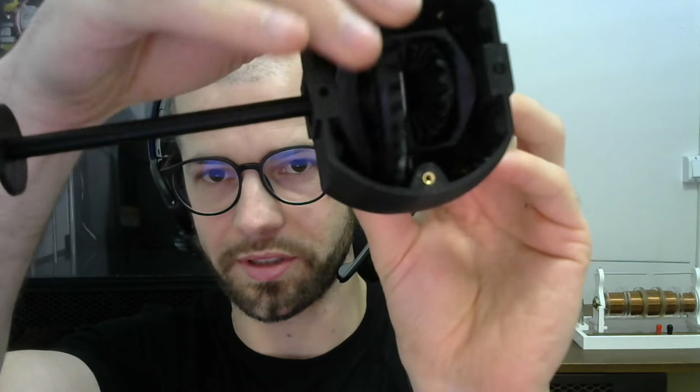I will start showing my first version of my differential, which is this big guy here. Inside you can see the gears. Let me rotate it a little so you can see the spiders and side gears rotating as I turn it. And if we rotate the shaft, you can see the entire piece rolling inside, which is amazing.

This was my first version because it was easier to make a bigger part like this, and then I decided to try making a small version of it. So I did a version with half the size, which is this one. I'm really proud of this version because it's small and more simple to draw.

Of course, it was more simple because I had a lot of experience from the previous one. It's flexible too, so it's easy to change and modify as you need. Let's see this working first.

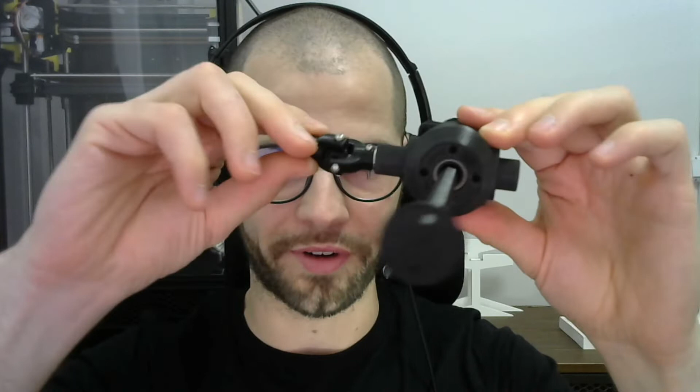As you can see, we can turn this. Here I can show it: we can just turn the main shaft, and the two lateral shafts will turn in this direction.

If I hold the main shaft and turn this one shaft, the other one will turn the other way around. And of course, if I just turn the shaft, this main one will turn again.

This little part was amazing to do, and it was more easy than the whole differential, but it was amazing. And that's it.

So let's break it apart to show each piece. These are just simple shafts which you can put here and easily remove. The goal is just to transfer the torque between this gear and anything you want here. You can just put a rod or make another part, as I will on this version.

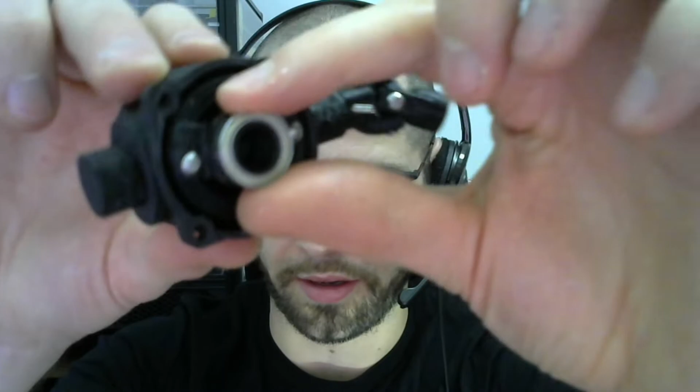Here we have the lateral connection, used for the main shaft that will hold everything. If I open it, we can see the holder of the bearing, and here the internal structure. I will need to remove this first. Okay, just remove it, and this is the whole case.

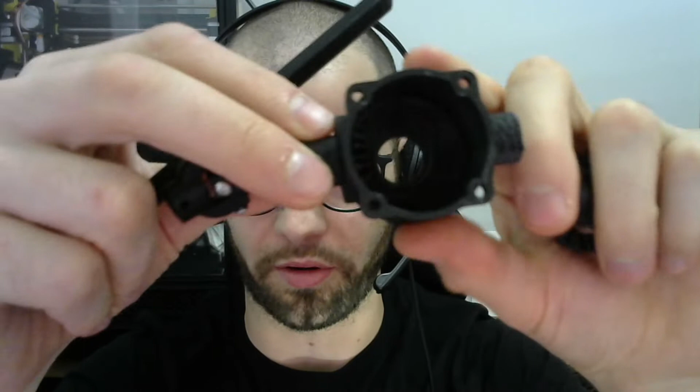We can see a gear inside of it - the main pinion. And here, let me connect the lateral shafts again.

It's really interesting to see this working. As I turn one side, the other side will turn the other way around.

I tried my best to use simple pieces, like using the same bearings inside and outside. On this one, I used only one model, one size of bearing. On this one, I used two sizes because this one is smaller, so we have two - one inside, another outside. And here, the four bearings are the same.

So it's easy - I can just remove it. This is the entire internal piece. Now it's easy to connect and easy to modify, as I will show you.

Okay, now I will show the Fusion process, how I did this differential. Of course, I will not show step by step, like drawing everything, because that would take about 4 hours of video. But I did a video showing how to do, in my view, the most complex part, which is this.

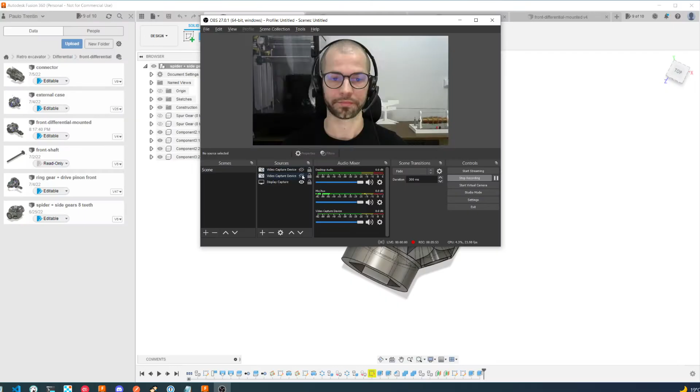So let's get to Fusion. I will start showing the first part of Fusion, the first part I did when I started making this smaller differential.

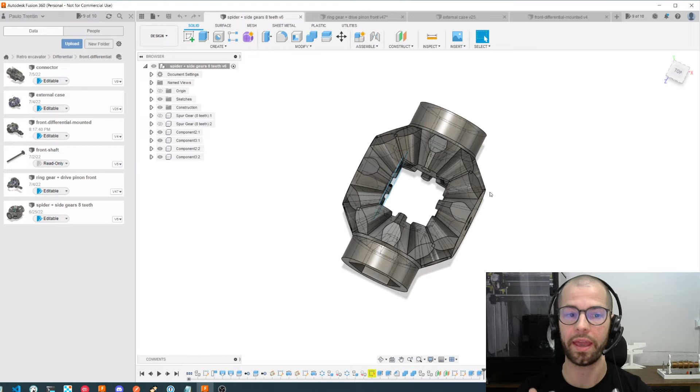Why is this the first part? Because I wanted it to be as small as possible, and the smallest gear I found viable for 3D printing, on a normal 3D printer like this, is a gear with 8 teeth. So all of those gears actually have 8 teeth.

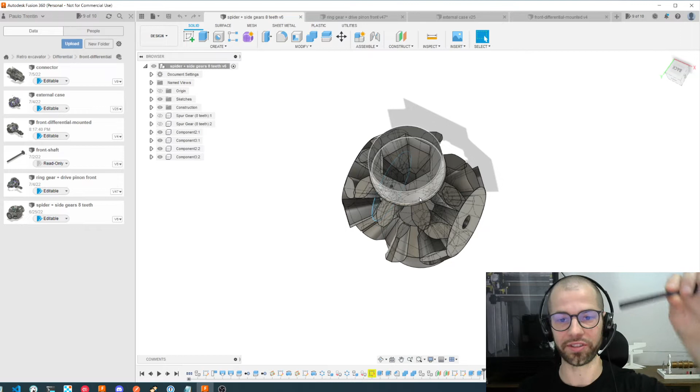These lateral ones are easy - we just have a hole here, and the top and bottom ones have this connection with the axis. This is interesting because you just plug it in and receive the whole force of the gear on this shaft section. So yeah, this is the first thing I did.

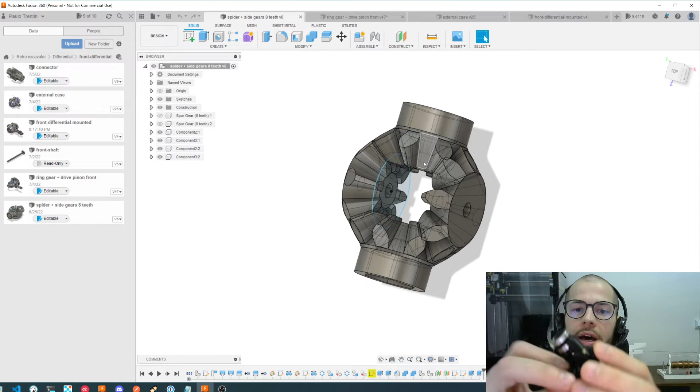Right after making this, I wanted to make this bigger one with the smallest size possible, because this bigger one defines the whole body of your differential, the whole structure around. So I try my best to make it as small as possible, and the knowledge to make this is the same as making these bevel gears, which I did an entire video about, two entire videos about it.

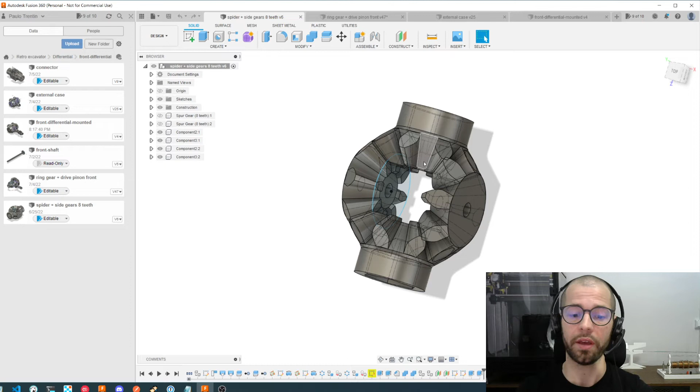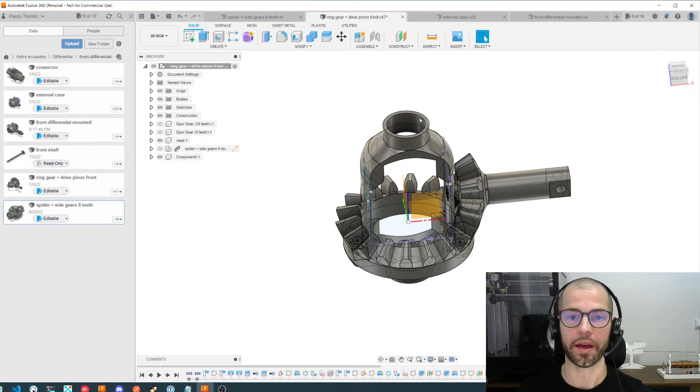Okay, so making this, we create another Fusion design, and one interesting thing about Fusion is you can import designs between designs. So I can create a new design and import anything I want around it. In this case, I just need to click insert into current design. So I will import this side gear, my side gear, inside of my drive, pinion, and ring gears.

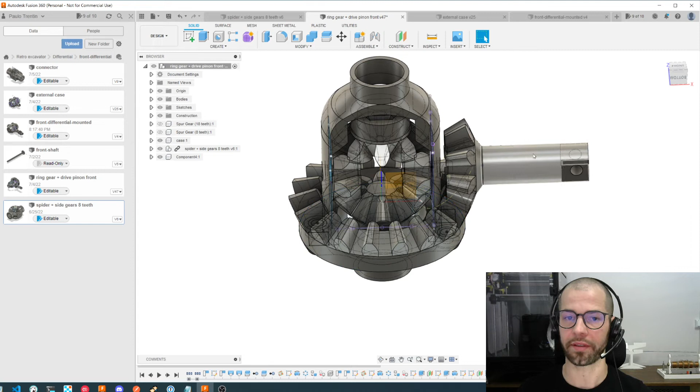So if I show here, I can show you the inside gears, and I use them as a reference for everything, because first of all, with this size in mind, I created this bottom gear, and of course this lateral pinion, and the whole structure here was created based on the distance between this gear, the ring gear, and this one. So everything was based and related on this gear.

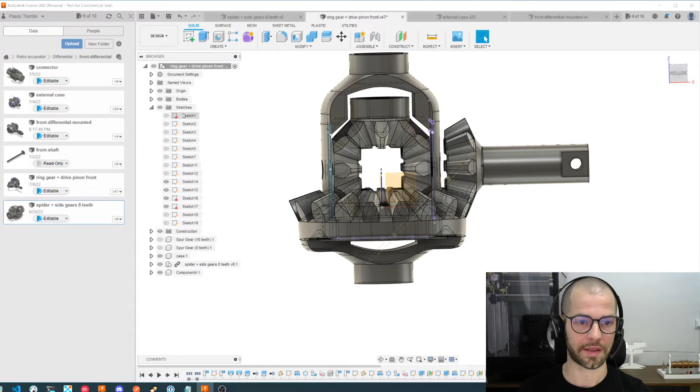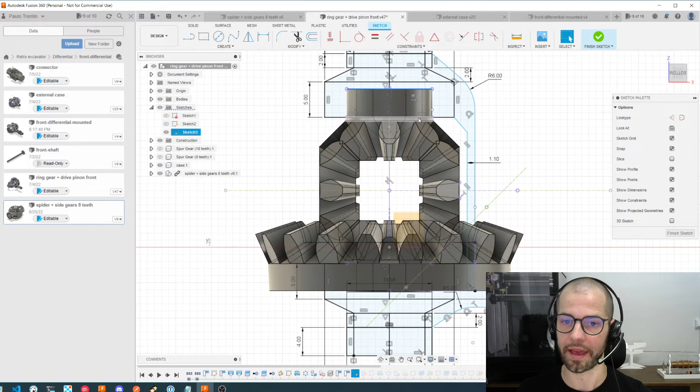So as you can see on sketches, let's get inside of sketch. This is the base gear. Yeah, this is the main structure. Let's edit it. Okay, now you can see basically what I did was importing these main gears inside of it, and I projected this line and this line, and of course the bottom ones too. Here I can remove this, yeah, this is better.

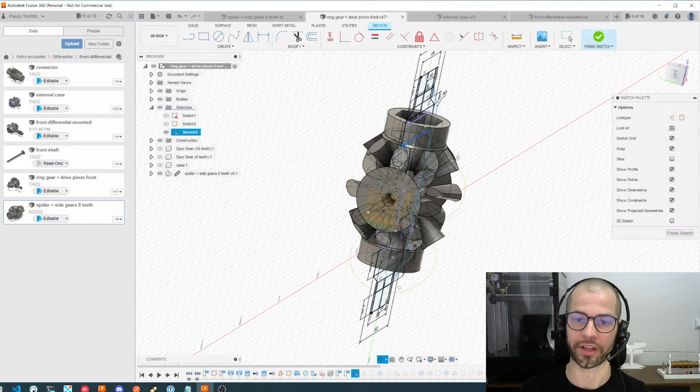So I started by projecting it and creating the whole sketch around it, because once you project, you have the exact position of each line you are projecting. This strategy was great, and it was easy to make everything around it, because what you just need to do is project the reference points that you want, and draw everything around.

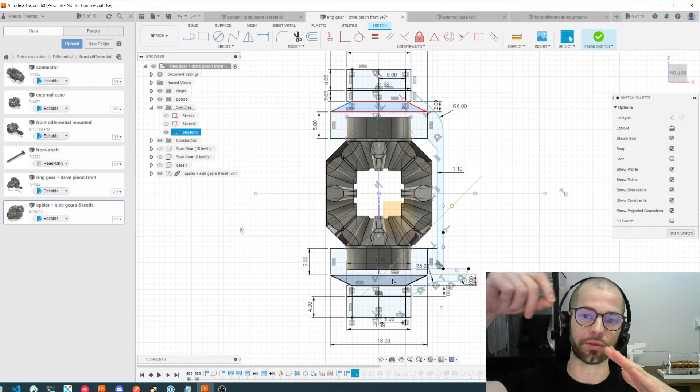For instance, this is the chamber of the bearing, and this is another chamber of another bearing, and those are connections, because on 3D printing it's not good to have a straight line, we need to have some angle to allow our printer to make the whole printing without needing to make bases on our print, which is good.

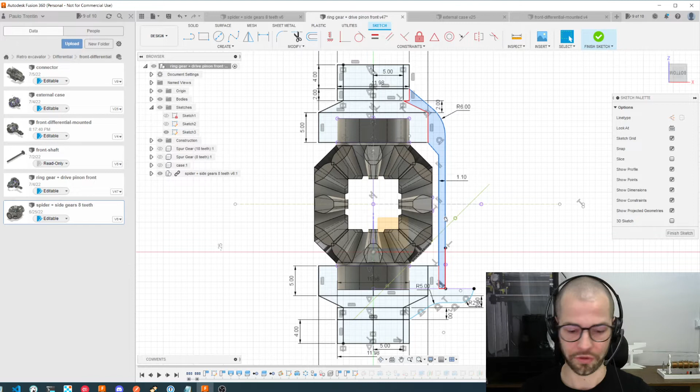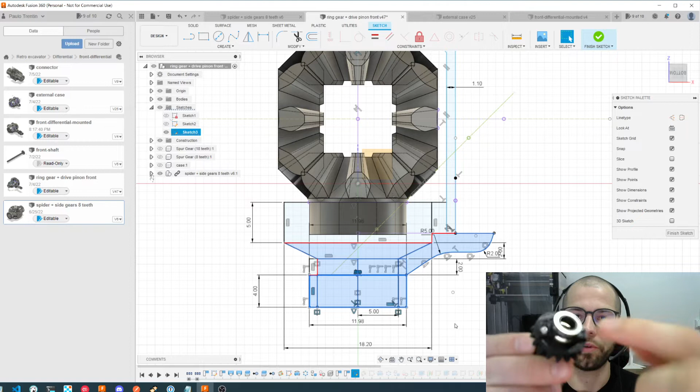So yeah, and of course I create this lateral drawing which connects those two parts, and this is the most important part because basically what this does is create the entire structure, because I will use the Revolve tool to make this whole structure around, which is interesting. And here I made the connection. So let's get this part, this whole structure here is a separate part, which I can disconnect and connect again. So this part which I just selected, let's flip upside down, yeah, this part here. So I can disconnect and put the gears inside, and connect and use these two parts together, which is incredible.

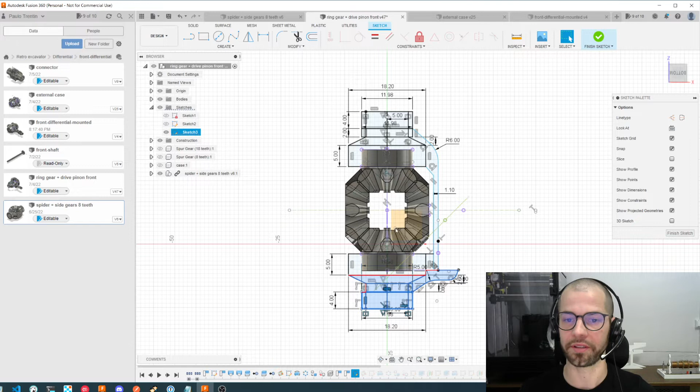Okay, so once I finish this sketch, let's show the case. I have a lot of bodies here, but yeah, the case is connected to the bottom gear, which is this one. Here, let's just connect, yeah. And of course, yeah, this is the case, the body 22.

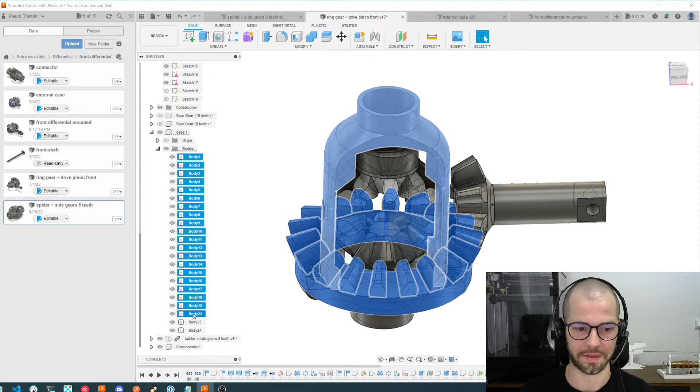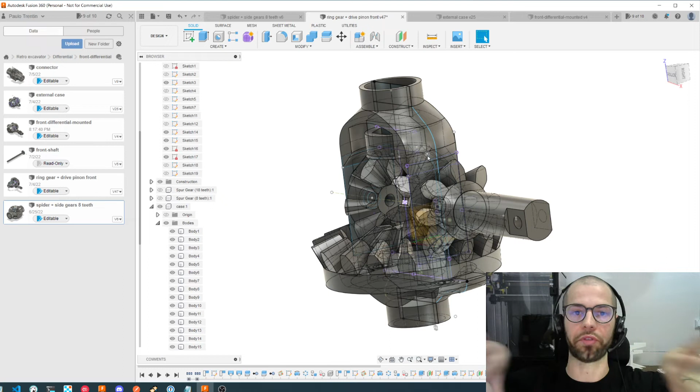So this is the case which was made by using the revolve tool inside of that sketch that we just saw. Let me show it again, yeah. And after it, we made the revolution around it, and I split the piece into three parts and removed the lateral parts. That's why I can see through it.

So of course this entire project will be available for download on the video description, and you can see everything I did on this timeline, which is incredible.

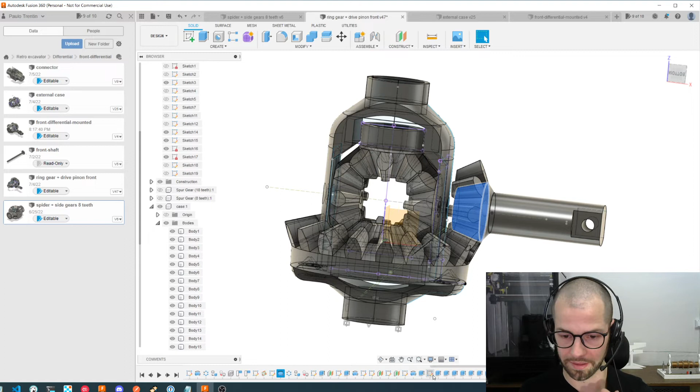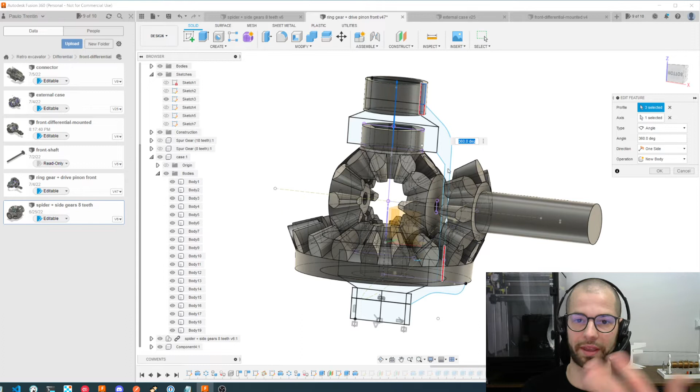This timeline is perfect. For instance, this is the one revolution. Let me get the other revolve. Yeah, this is another one, which is for the bottom, and yeah, this is the one I just talked about. So as you can see, the revolve creates the whole circle around. I can edit if I wanted to, for instance remove parts of it, which is not the case right now, but just for showing, you can understand by seeing this timeline, you can edit everything, which is incredible, and see the source code, let's say, of this entire part.

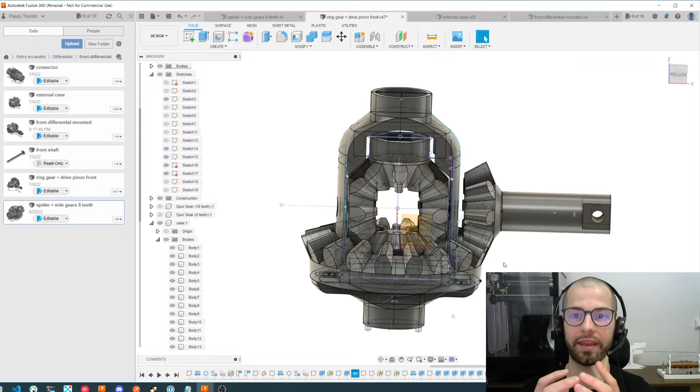Okay, after doing this, the next step was to make the entire case. I call it the external case, which was a part using these ring gears that I just showed to you.

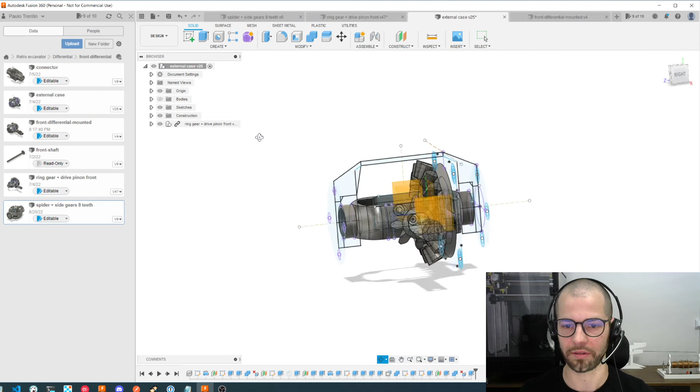So I imported this into a new drawing, and again I use it. Let's show on this angle. Okay, as you can see in purple, those are projections that I did from the previous design. Like this one is a projection, this other one is a projection, and I use those projections to make my external drawing, which will be the case, this case around everything.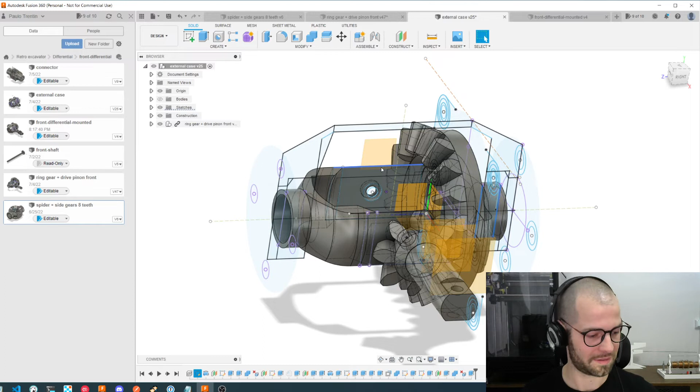And yeah, that was really interesting. Again, I used the same concept, just making a sketch by using the reference points that I took from projections, and making it revolve around something, then making some adjustments.

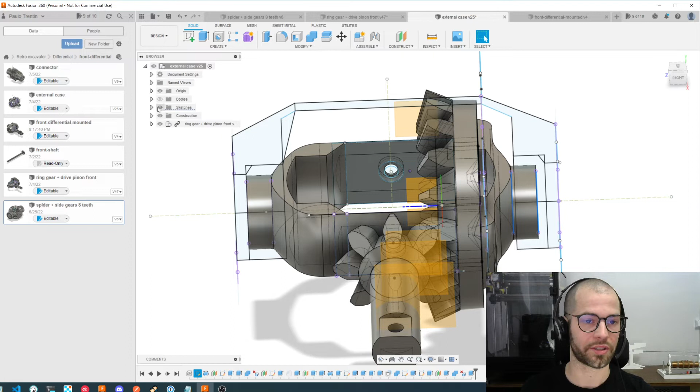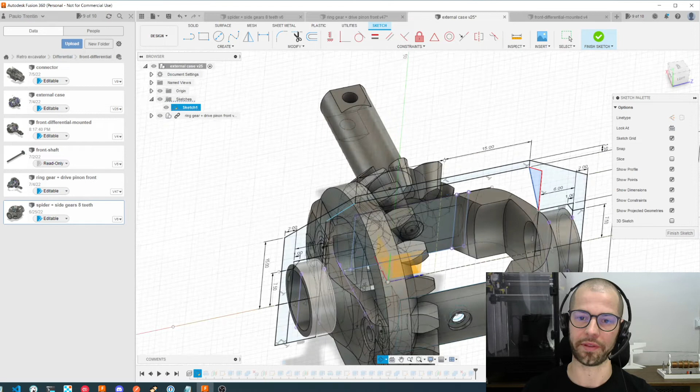So let's show some adjustments here. The main sketch is this one. Let's edit it. We have a lot of information about the distance between each part. Here is a part for helping 3D printing, because this part will be printed on this side, and this helps our 3D printer make a good print.

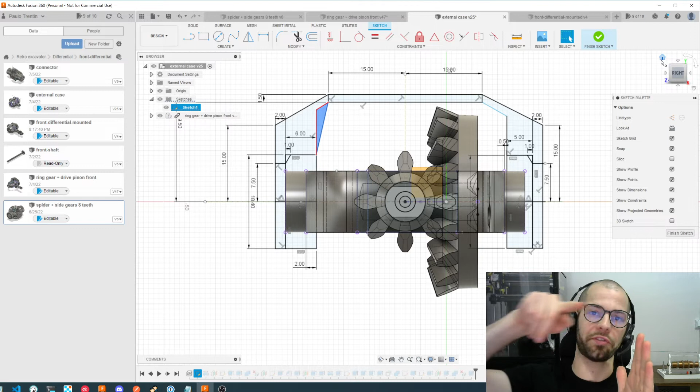So these small details are important when you are printing. You need some angle to print parts, to make connection between some parts when the printer is closing — you can't just make a straight angle because it won't print well, without support, of course. That's the whole goal here, avoiding using support on 3D printing.

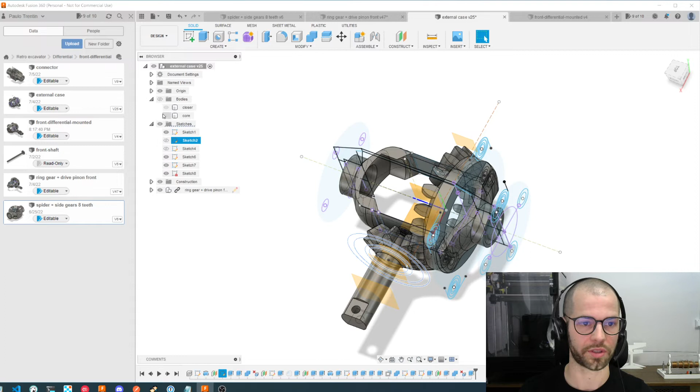Okay, this is one sketch. Another one will be related to making the external part, which is — let me show you. This part here, as we can see. The second sketch is related to making this whole part, which I extrude to allow the main pinion to connect on this differential. And of course we have a lot of other sketches.

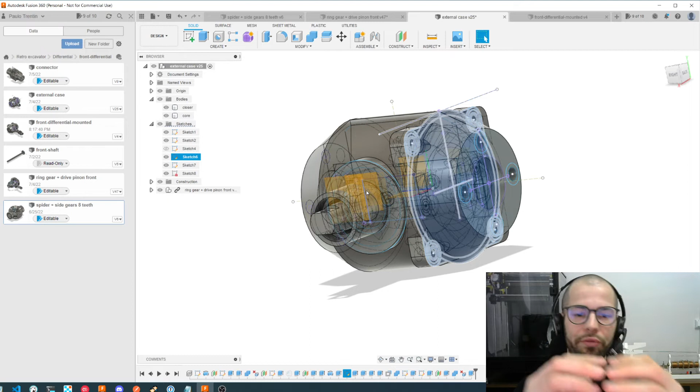For instance, this one makes the connection. We need a way to put all the gears inside and easily remove them. It's not the most beautiful way, but I like it because it's easy to use. I can easily put some screws here, and it works great. So I remove and put again, and easily fit everything together.

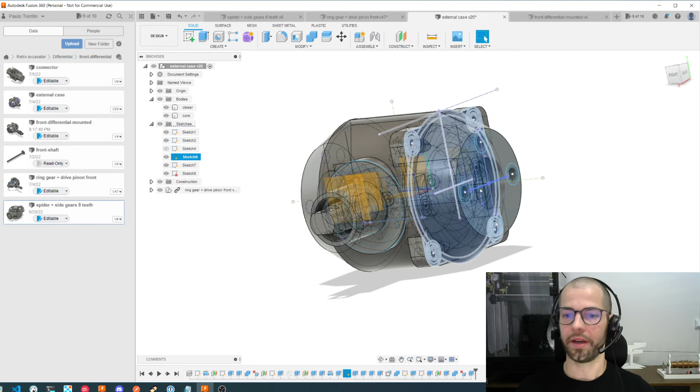So yeah, it was this part, and the last sketches are related to the holes to make it available — for instance, this hole here for the external connection, and the holes for the future connection, which will be the future part of this entire piece.

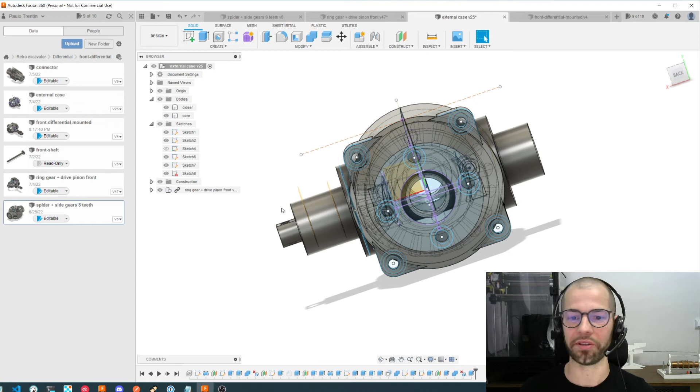It's flexible. The good part about using Fusion is you can — of course other software has this too, but I just know Fusion — easily change everything you do. For instance, let's say you want to print this differential but you don't want this front part here, because on your project you don't need it.

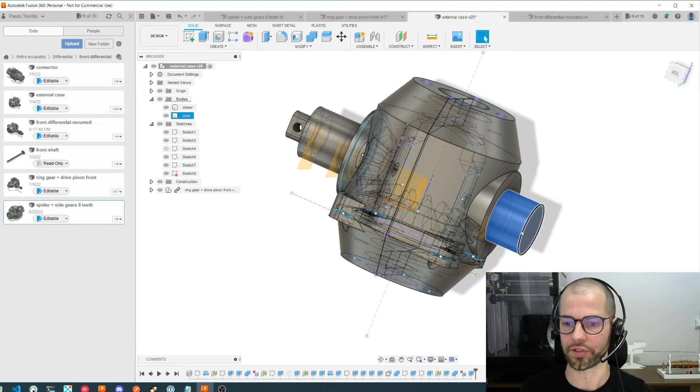In my case, I need it, because my differential will make this movement. So I need a way to grab it from here and from here, and it needs to turn. That's why I did these two supports here and here, where something will grab those and allow the differential to turn.

But let's say you don't need this — you just need to remove this part, because the other one, of course, you can't, otherwise you cannot have the connection. But let's remove this one.

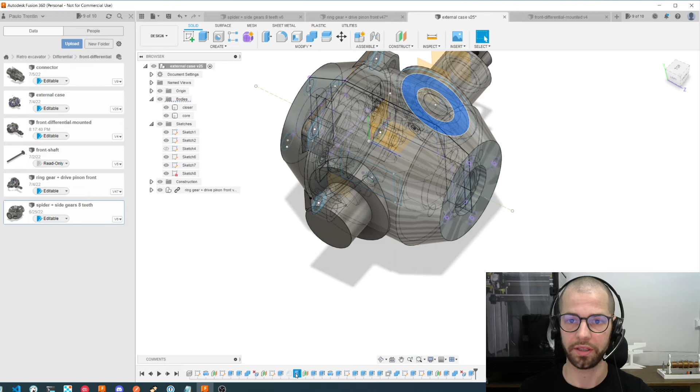So the only thing you need to find on this drawing is how I did that. Of course, I just look at it — I know this is the extrusion responsible for it, but you could search any extrusion like this, and you can see those extrusions are related to the front part.

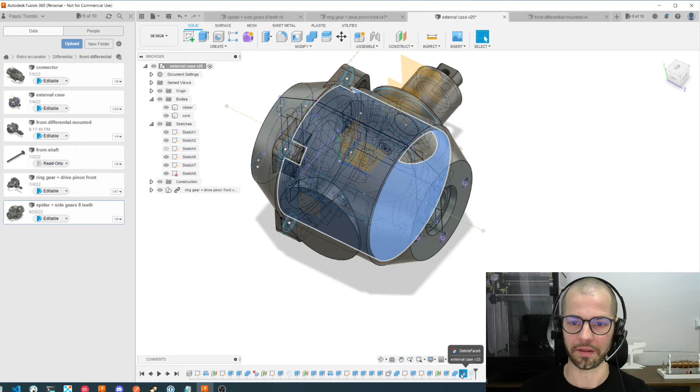These are various shafts. Okay, this one is holes, and this is the lateral part that I want to remove, and of course this one too. So I can just suppress features here — this one I don't know, this one I don't know, but this one I want to suppress as well.

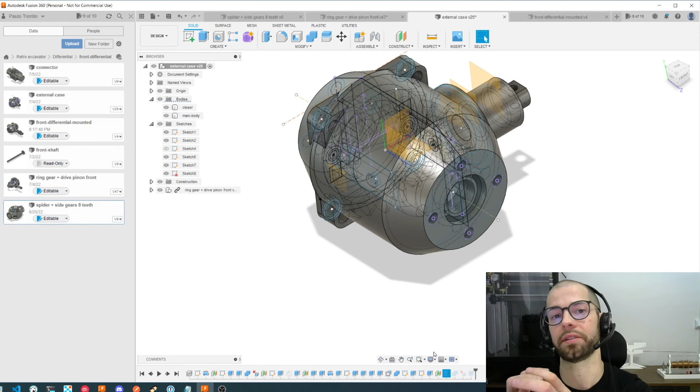So as you can see, I suppressed this one, and those connected to it are suppressed too. I could just unsuppress again. If I do this, suppressing this one suppresses everything related to it that needs it to work. Fusion is amazing — it's so easy to make things.

So now you have a differential without the front pinion, which could be better for your project. You can increase the holes easily too, because these are made on sketches, so you can see the sketches are mirrored — if I change this one, the other one will change as well. The same applies here, so it's easy.

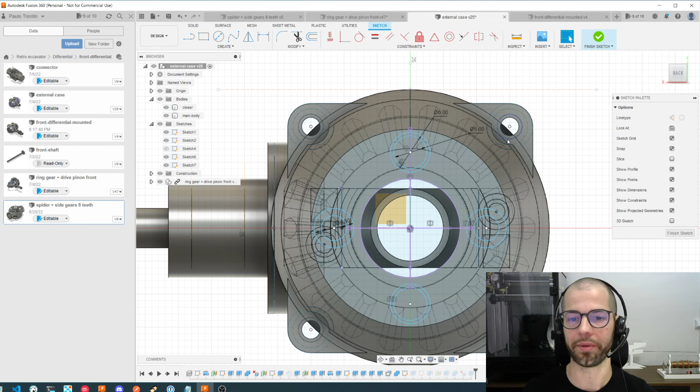They are not connected right here, but you can connect them. But it's easy if you change the size — let's say change the size of the hole here from 3.8, let's put 5 millimeters, and apply it, and you have new holes with 5 millimeters.

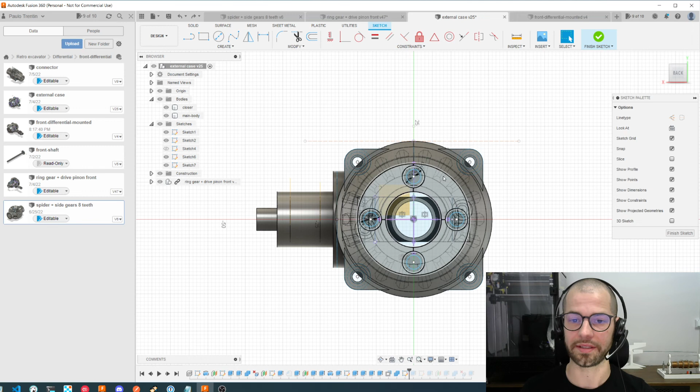That's amazing, because you can easily change any part of your project and just apply it, and Fusion makes the new extrusions for you, and you can just export the part and print it again. So it's really easy to modify. Let's undo my changes here — it's really easy to modify and reuse your part as you need.

So yep, that's it. That's my main tutorial. Let's wrap this part up.

So I hope this entire video showed you how easy it is to use Fusion, and most important, how you can split a project — a big project like this entire differential — into small parts inside Fusion, and connect those parts using a reference from one part to make another.

Fusion allows you to make amazing things, and for me it was like I fell in love with Fusion when I first used it, and each time I use it, I love it more. Fusion is for me a great tool, and it allowed me to make these complex parts without that much knowledge, and now I can make my own projects and have my ideas in my mind turned into physical products or parts, which is incredible for me.